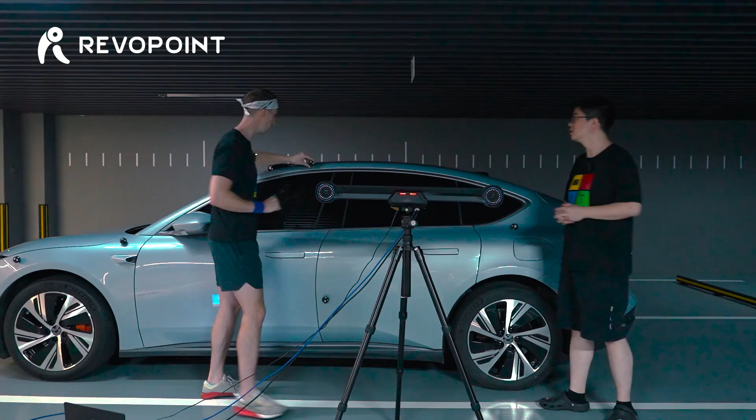The only prep you do need to do is simply these marker block anchors. When live we showed you how you have to place them, the tracker needs to see at least 5 of those as you're transitioning around the vehicle. It comes with, when you buy your Trackit, 6 of the actual anchors, and it also comes with magnetic ones, 10mm size, really handy for anywhere that's magnetic. But we also suggest for those spots like right here, this is plastic, not magnetic, we have the sticky 10mm ones too, that you could maybe add a few.

But it's nothing like before when we have to load it up with markers. This is just simply anchors so that you can more easily transfer around the vehicle. The tracker has a rather big FOV, so just make sure at least 5 are in view, in a frame, and it'll do.

Okay, so here's what you can choose under multi-positional scan. It'll ask you new global marker mode, so do click that. Normally you have 2 options. One is you capture all of the global markers, all these anchors at once, and you just click next stop because you have everything here in the first stop. Then you scan it one by one, station 1, station 2, station 3.

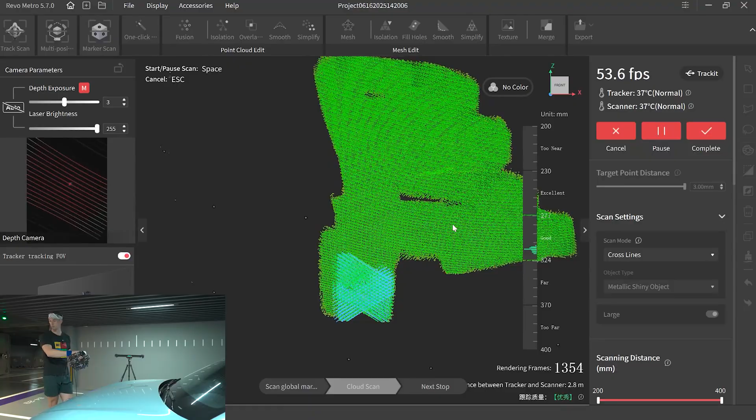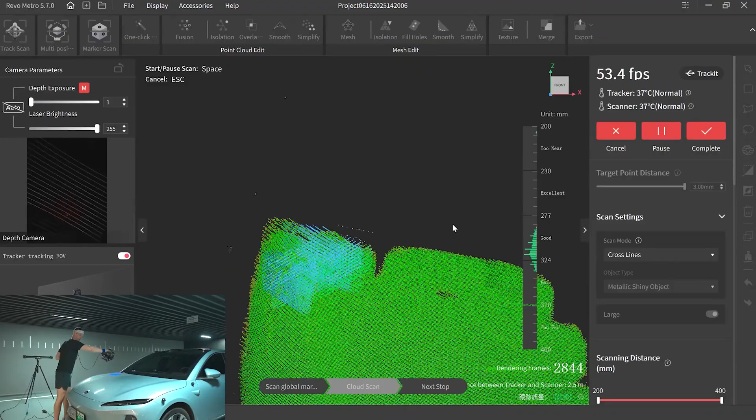Yeah everyone, if you ever want to zoom in, there is the M button on the scanner that I'm holding. I'll push right now and you can see what happens. For me right now though, I'm actually comfortable enough just keeping it the normal viewing pattern.

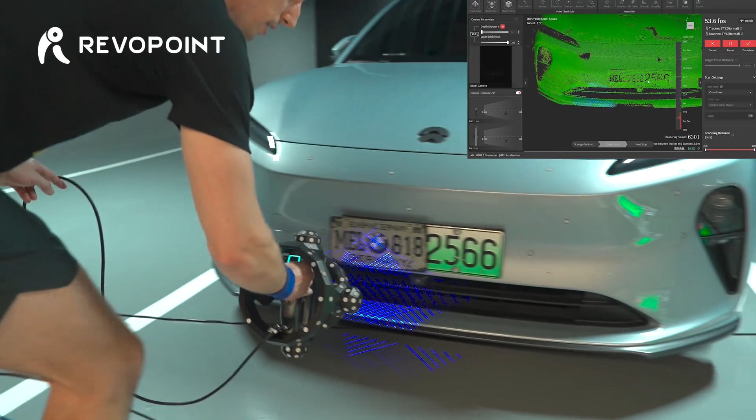So as you can see, I can still get really low with the tracker. I'm all the way down here and it's still picking up the markers on the scanner itself. When it comes to me maxing it out, right there is about me maxing out. So really perfect, just right as I get to the edge of the car here. The maximum distance is 4 meters.

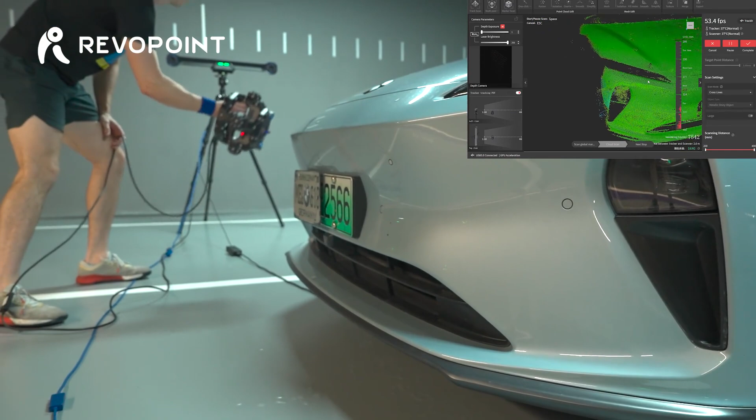So like I was saying earlier, now it's like I can turn my back to it, it's just kind of annoying seeing it. So we'll pause it. Actually, you can move the tracker even during mid-scan, if you, like us, registered all of the global markers in the first round, then you can do that. Feel free to move it. If you have a friend to help you move the tracker, then perfect.

Okay, next station. This one is going to be tricky to see the computer from while doing that station. No, not really, unless you hold it up. You want to hold it up right here, or I can put it on the hood? Put it on the hood, since we've already scanned the hood. That's a good idea. There we go.

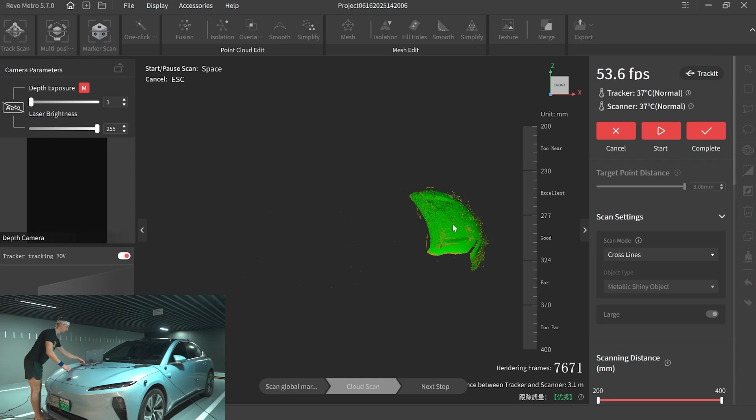Okay, should be enough. Maybe a little bit more on this side, so.

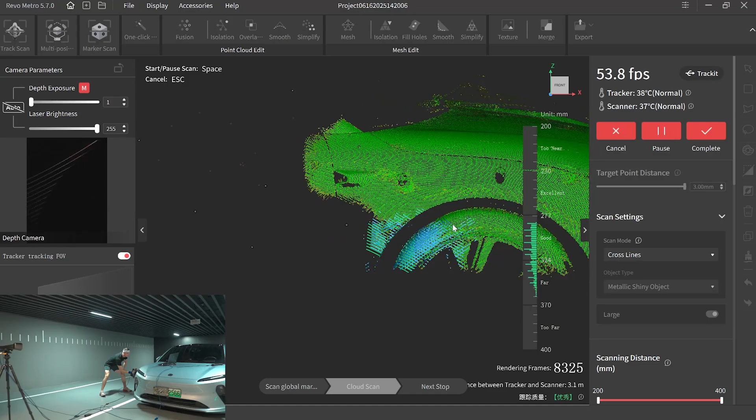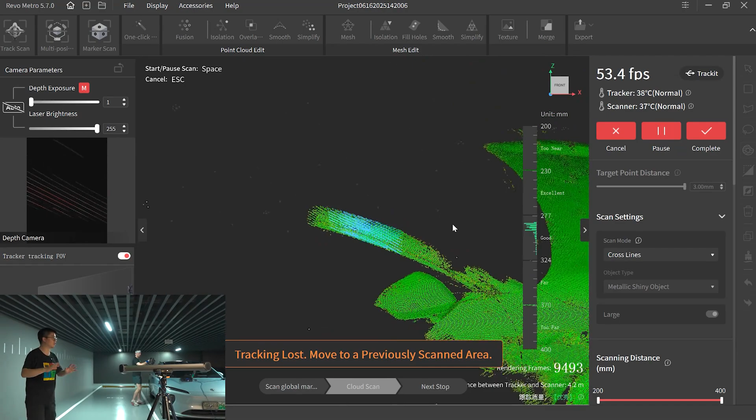And guys, as you can see, why I actually shift it a little bit to the left is because both eyes of the tracker must see the scanner. If we put it a little bit to the right, then the right eye will be covered and cannot see the scanner, which will cause losing track. But no worry, you can always change the position of it.

Just feel like I'm in a body shop painting this thing.

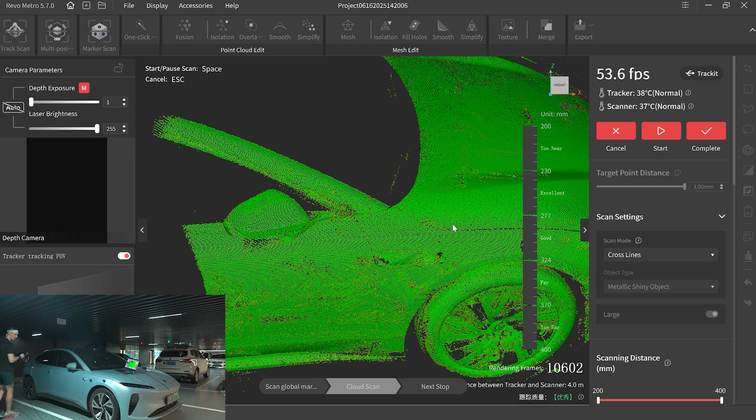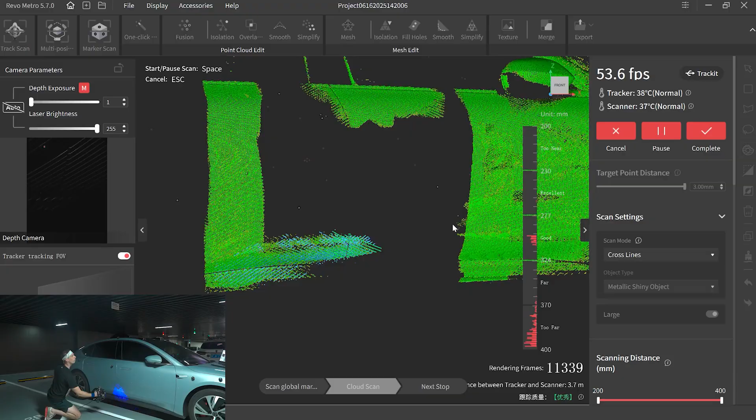Okay, I think I see you max out, so let me just help you move towards it. Okay, go. Thank you. Okay, that's maxed out again. Yeah, it's all right. I don't think I want to move it forward more because we can put the tracker on the rear side. No problem.

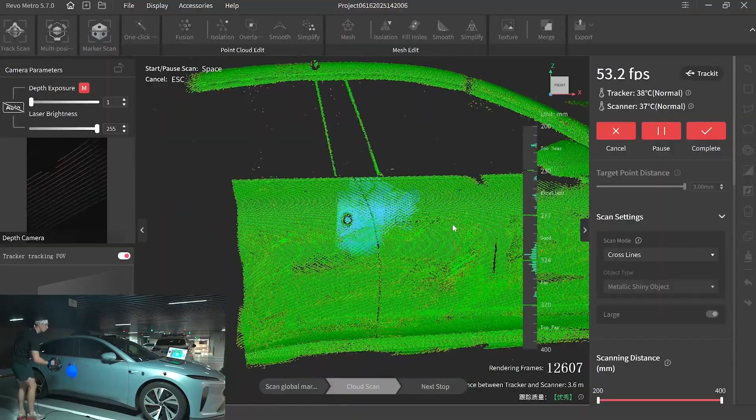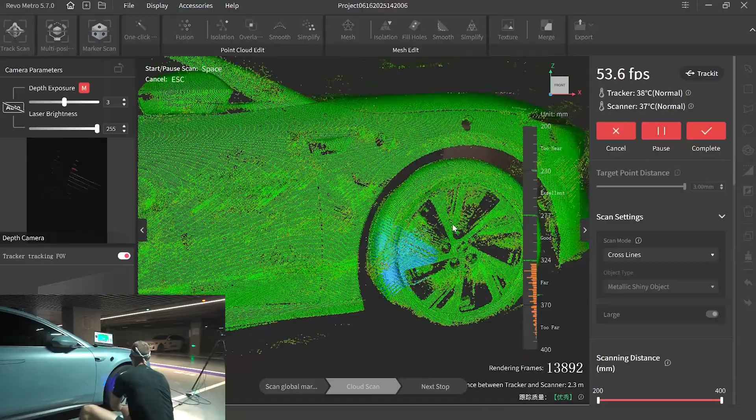Cool. Underneath there a little bit. Okay, these tires some more. Nice, happy with that.

Okay, now station 3, maybe here? That sounds good. Okay, we'll go down this side of the car. Yep.

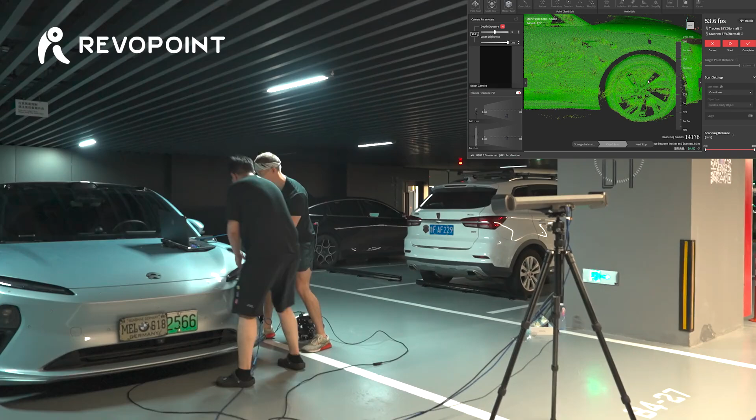Maybe the cable should go along the other side, so it won't interfere with capturing that. Yeah, so it won't interfere with you. Okay, that's good.

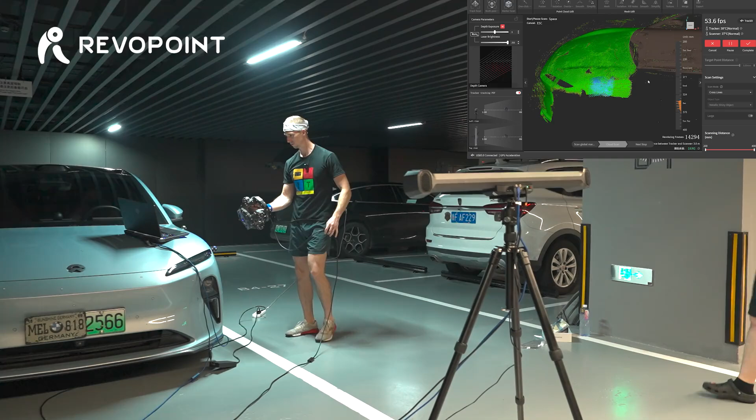Those rubbers on the laptop work pretty good, not sliding off. Yep. If you break that laptop good, I can get a 50 series graphics card.

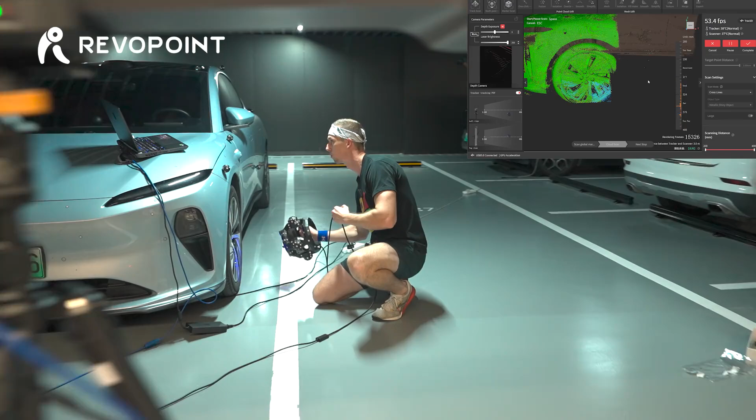So right there is about our max. Draw a nice line down it.

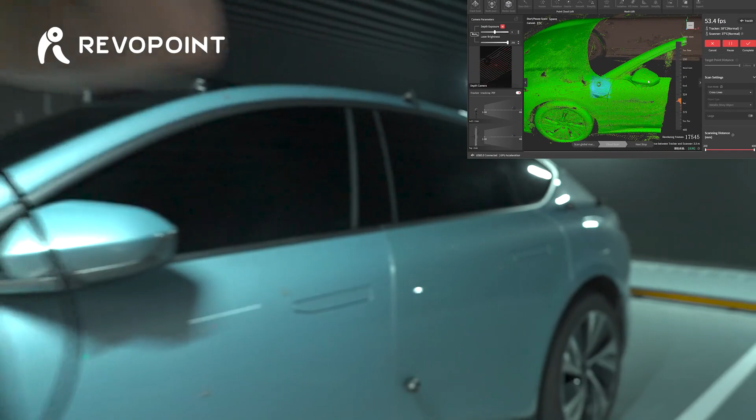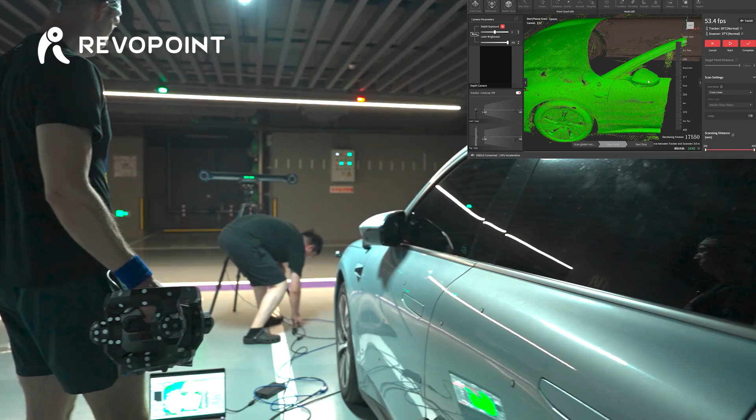All right, Ash, okay, move it a little more this way, forward. Hold on. Okay, excellent, good to go.

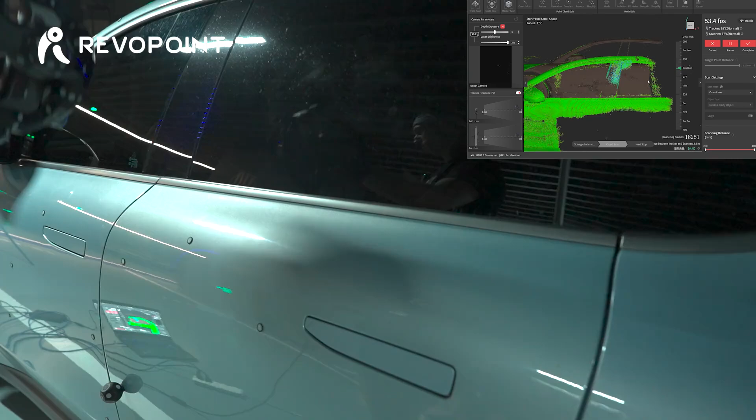So here again, I mentioned earlier in the video how powerful the laser is, it is actually picking up some of the window itself. Oh, wow. Maybe because of the tint, it shows how powerful the laser actually is. It's impressive. The energy level must be high on this one.

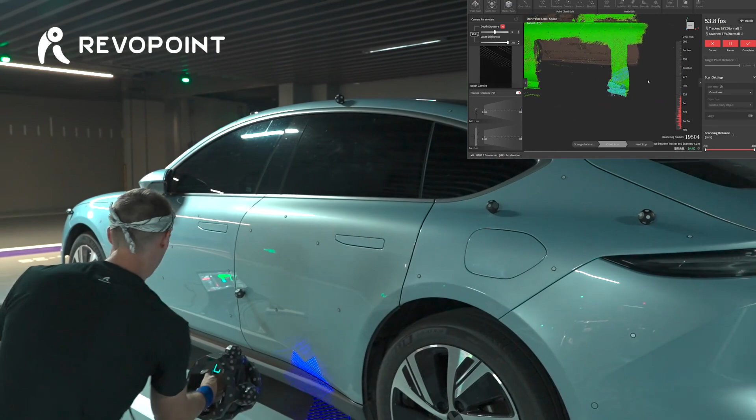Translucent, right? But obviously if you really want to capture it, you probably still need to put some spray scan on there.

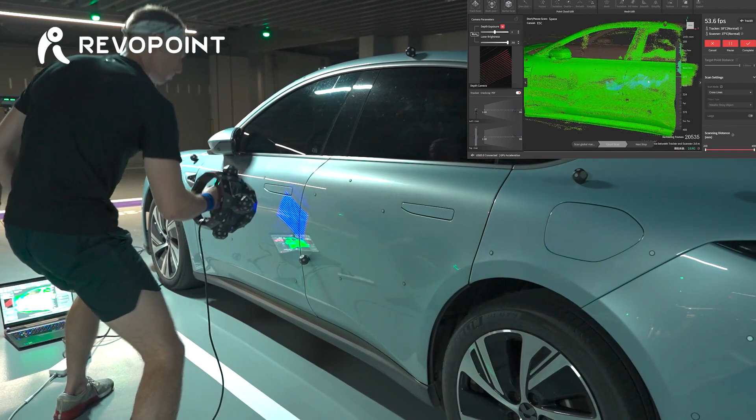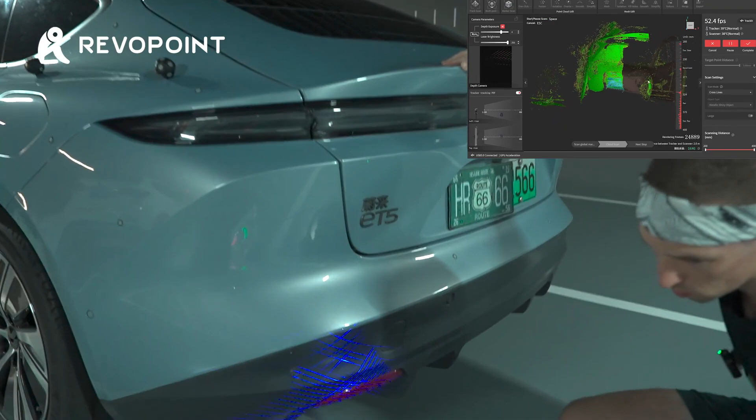Okay, we're halfway there. Did we finish the car hood already? The hood's done. Okay.

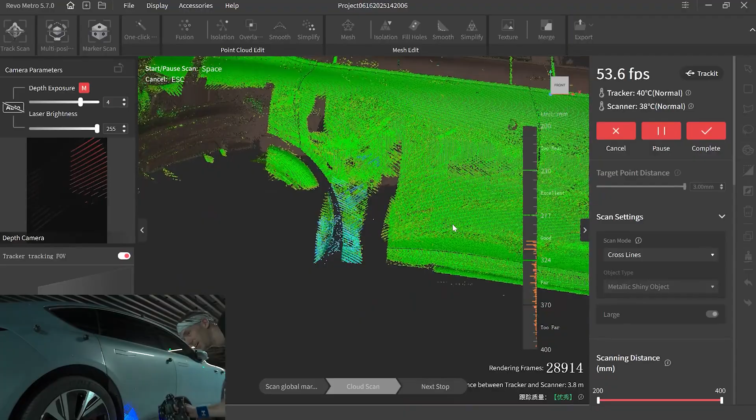Officially connected with the original point clouds. That's a tight stitch. Yeah. Airtight stitch.

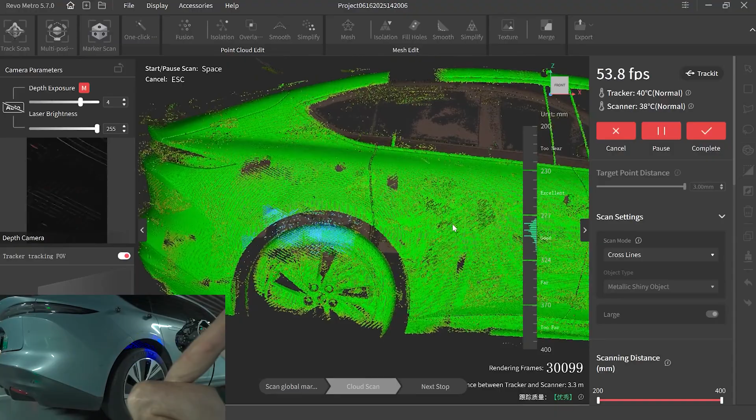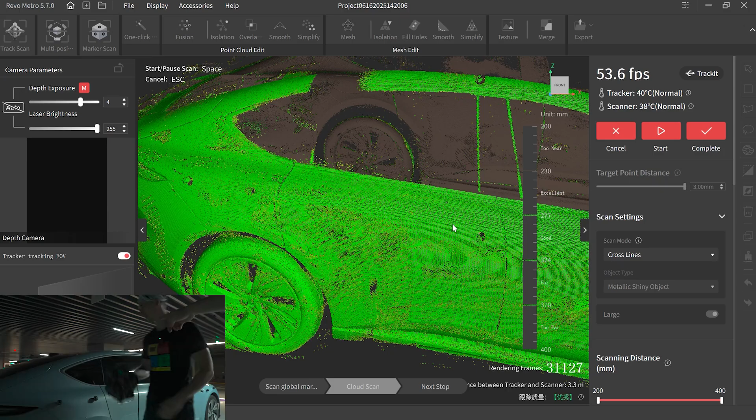It's pretty much that. Obviously, if we felt like sweating more, or if we had AC, we could really take our time and capture more of those point clouds, but mission accomplished. You missed a bit on the roof, you see. Oh, there we go, yeah, at least fill that, and that's easy. Thank you. Okay, that's good enough.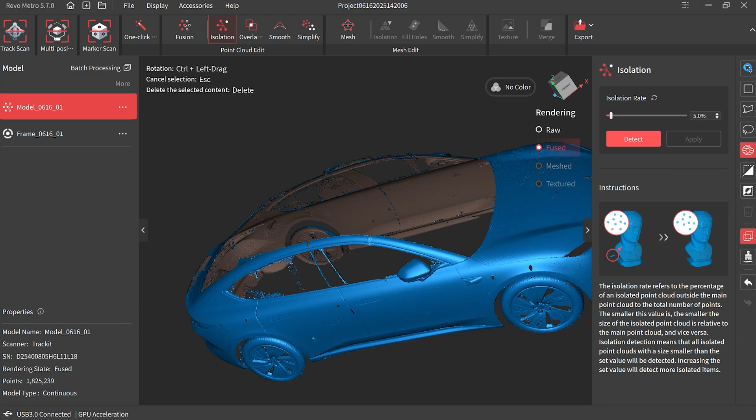Okay, so what I was just showing you is a temporary fix. The point cloud should be all right when we ship everything out to you. Okay, so now let's double check the overlap and finally we mesh it.

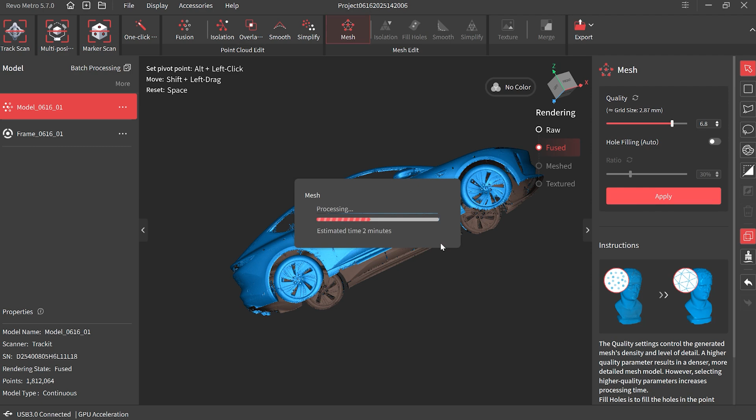Okay guys, so that's how you scan a car with Trackit. Pretty easy, right? You just need to either register all of the global markers or the anchor blocks in one run if you have a friend willing to help you with that. Or if you're solo and you can't do that, you can choose to do it step by step, like maybe a quarter of the area at a time and repeat 4 times and you should get it. But of course, we want to stress this is still, even with this good of a result, the early stages of the software, so it's only going to get better from here on out. So we look forward to when your Trackit arrives and you do some car scans. You're going to be getting some awesome results, and we look forward to seeing those. Take care, bye-bye.